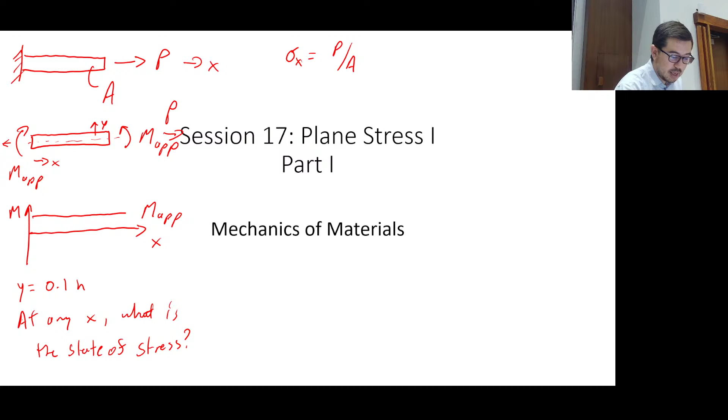I'll go ahead and say, all right, we know it's a rectangular beam. It has a width b. It has some height h. Okay, what is the how? Go ahead, start spewing some algebra. Yes, Mark. It has a stress from the P value and the bending stress.

Okay, yeah, so we're going to say the sigma total. Are there any... so in this case, right, are there any shear stresses involved? First off, I'm making an assumption that there's only normal stresses. But are there any shear stresses involved here?

What? Why do you say that, Stephen? Okay, this is a very interesting point. Are you right? Who agrees with Stephen? Is there a shear stress present in this beam? Yes, you agree, okay, all right. What is the equation for shear stress? VQ over IT, okay?

Also, what is the relationship between moment and shear force? dM/dx is equal to V. Well, what is dM/dx here? Okay, so M is constant. What is dM/dx? 0, right? So this is going to be equal to 0.

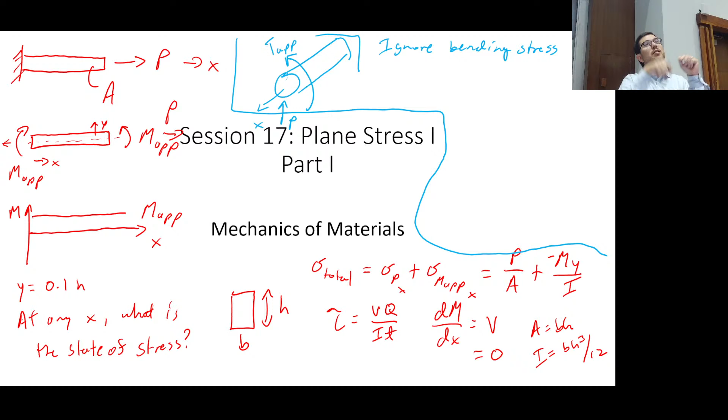Okay, it's not that complicated, because it's just going to be a function of x. It's the quantity P times quantity L minus x. But I don't want to do it right now. That would be negative M, where M is equal to P times quantity L minus x. Or actually, it's P times quantity x minus L. Because it's negative... no, it's positive because of the way it's drawn. So that's why I didn't want to do it.

Okay, so let's just talk about the shear stresses here. One thing to note, and I think it's maybe more difficult, is the transverse shear stress, so let's talk about that one first. The transverse shear stress is caused from the P.

And if I took a slice along the beam, not stresses now, but if I took a slice there, what would the internal shear force look like? Just negative P? Okay, actually no, it's just positive P. It's going to be exactly like it's drawn here. Oh, because of the reaction. Yeah, exactly, see, you just got it, right?

And this is one of the things I tried to explain in the video. If you go back to the question 3 video from yesterday, what you'll see is I went through the whole exercise of: here's what the beam looks like, this is the reaction force, then when you take the slice, you just gotta know that with the conventions we're using, the internal shear force on this slice is going to be in the same direction and at the same magnitude as whatever's applied at the end of the cantilever. So that's what the internal shear force looks like.

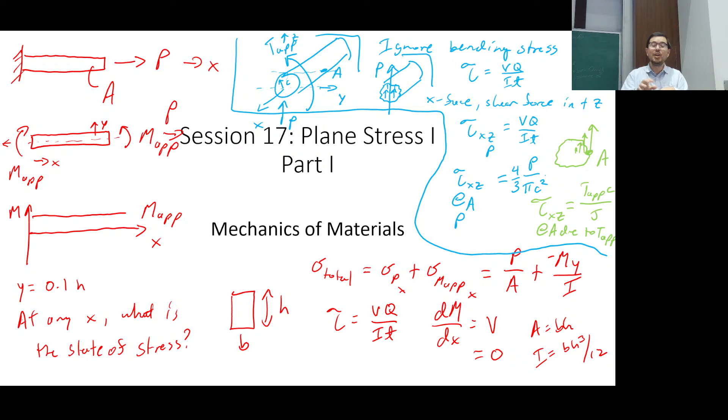We're trying to figure out how to describe the state of stress essentially throughout an entire object. And even if you're looking at the finite element analysis, right, you're like, ooh, nice, pretty color pictures, right? We want to be able to understand what those pretty color pictures mean, and it's not just, oh, the color is less than this value. Actually, we do some very smart things to kind of make it that way later in the class.

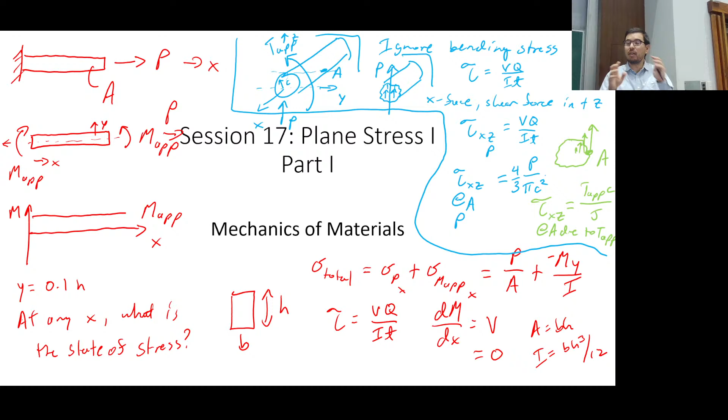You use something called the von Mises, or you could calculate an equivalent stress so that you can do that, all right? But the point is we want to be able to understand how to describe these 2D types of systems and their stresses that they might have, okay? So let's go on.

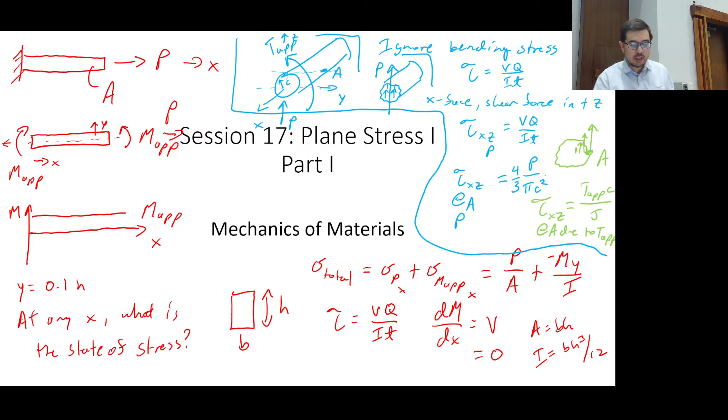Today, we're going to use method of sections again, and this time with rotated elements. We're going to transform material elements. Imagine you have a state of stress, right, from your combined loading analysis. You had this beam with some tau, some tau xy, some sigma x. Now we're going to rotate that element, look at it from a different perspective, and get a new set of stresses.

Now, these are equivalent states of stress, okay? But by rotating, sometimes we get a simpler description that allows us to relate more closely to the material testing we've done. You're like, wait, why? Isn't it just nice that... no, we want to rotate the element to get a more relatable depiction of the stresses. I hope that will become more clear.

And we're going to use this. I don't expect you to understand right now, but I do expect you to understand this in about 15 minutes. This is one of the ways we perform this equilibrium to figure out these equivalent stresses.

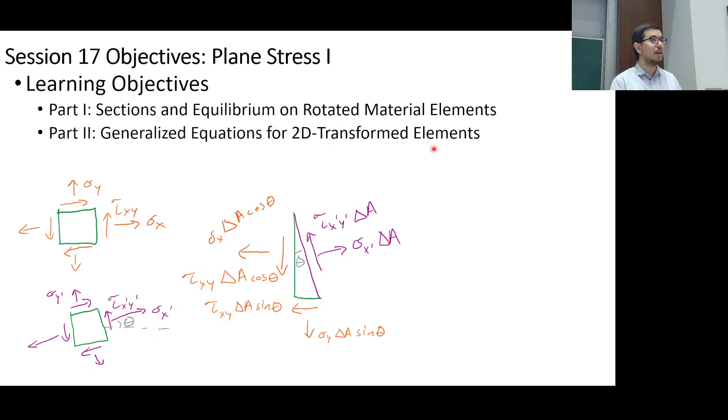We're going to then completely skip this technique and say, here are the generalized equations for these 2D transformations. You'll write these equations on your sheet, and then I will ask you on the exam to do it the old-fashioned way, and you will check—without telling me—that it matches your 2D transformations or equations, okay? You got that? If you bypass it and do it this way instead, you will not get full credit. You can take a look at previous exams to see examples of this being asked.

And then we'll talk a little bit about stress tensors and rotations, and how you can do this in Python or use linear algebra to perform these calculations. That is not that exciting for you, because I wouldn't ask you to use stress tensors on an exam.

So you're like, oh, okay, shut that off, I don't really need that. But there's a question that kind of gets to this point, and I think it's good to know. So if you take a grad class or do further work in mechanics, you'll be able to understand how these tensors are relatable to each other.

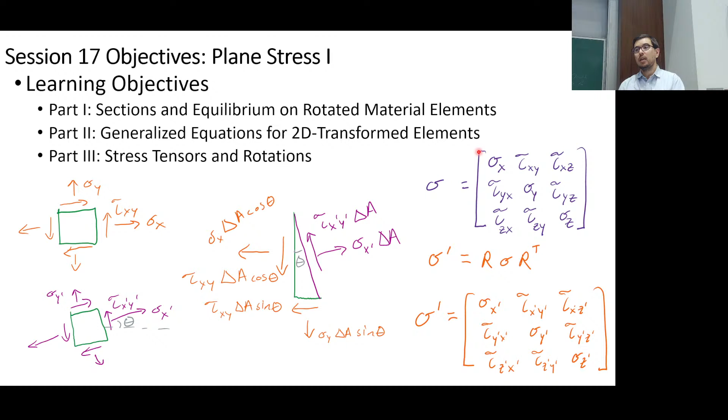So let's go to a generalized depiction of stress. We have 6 terms. At this point we're familiar with sigma x, sigma y, sigma z, tau xz, tau xy, and tau yz. So those are 6 terms: 3 normal stresses, not principal yet, and 3 shear stresses, that allow us to describe the state of stress in 3D for a linear isotropic material.

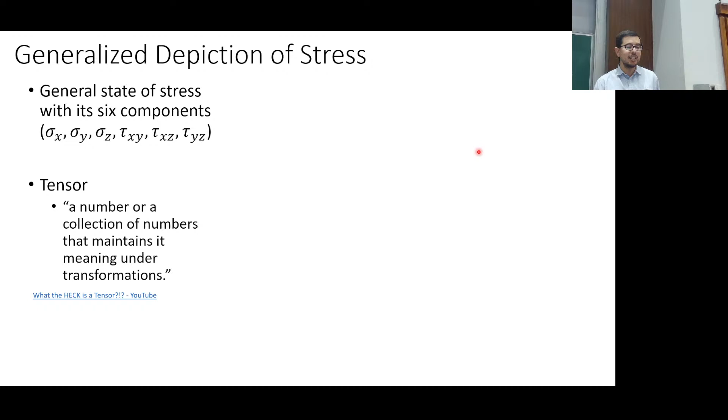The tensor is going to be a collection of numbers that maintain their meaning under transformation. You can watch a fun YouTube video on what the heck a tensor is—it's illuminating. The basic idea is that if you rotate the material element, since we're doing mechanics, we get a new depiction of equivalent stresses, and that's going to be equivalent to the original state of depicted stresses. That's how we connect the tensor math to a physical system.

But if you're just looking at the math, the property of a tensor is that if we rotate it, it's going to give us an equivalent depiction of what's happening.

So let's just refresh our memories in terms of how to draw these stresses, and we've already been doing this. We've got a sigma x on one side. We've got maybe a tau xy, maybe a tau xz. We've got other stresses on another face that we can draw out. That's a sigma y coming out there. We have a tau yx, a tau yz. And we've got this face here, right? So when you think about it, a tensor is not a bad way to depict all this information, because there's quite a bit happening on the face of a material element.

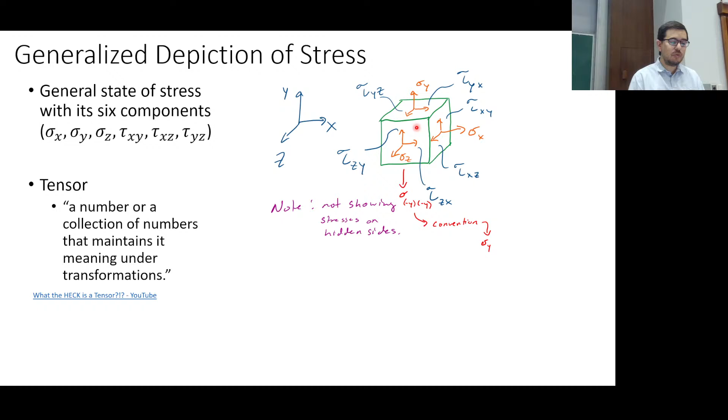But again, we only need 2 subscripts, right? Don't go into another class and say, oh yeah, but we discussed tensors, Aaron said that we just needed 3 subscripts. Be like, what? No, 2 subscripts, 3 values for each of those subscripts, at least for 3D. And we discussed before, like if it's in the minus y direction on the minus y face, then that's going to be equivalent to sigma y.

And then if you look online, you'll see some kinds of fun depictions of stresses on faces. And you know, one thing that we may have forgotten, is that in reality, these stresses that we're talking about are representing components of a traction vector, okay? That is kind of this internal force or internal load that you might have in your element, in your material, in your structure. These stresses allow us, these are the components, because these stresses are in fact scalars.

The Cauchy stress tensor can be written like this. We typically write it like this. It's the same thing though: 1 for x, or x for 1, 2 for y, y for 2, 3 for z, z for 3.

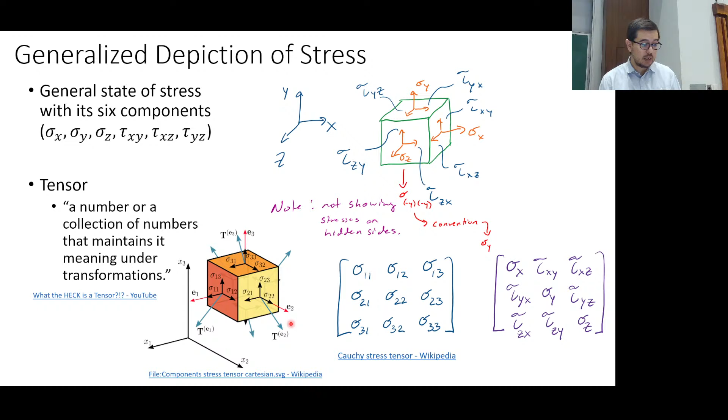Okay, now we're going to talk about a particular type, right? If you look back to the title of these slides, you're like, it said plane stress. You haven't even told us what plane stress is. Okay, well, here we go. Plane stress typically is going to be on a thin sheet of material.

And plane stress, yes, as you can imagine, it means plane in the sense of planar, right? Not in the sense of vanilla yogurt. Actually, vanilla yogurt is not plain yogurt, right? That's right. Yeah, plain yogurt is plain yogurt.

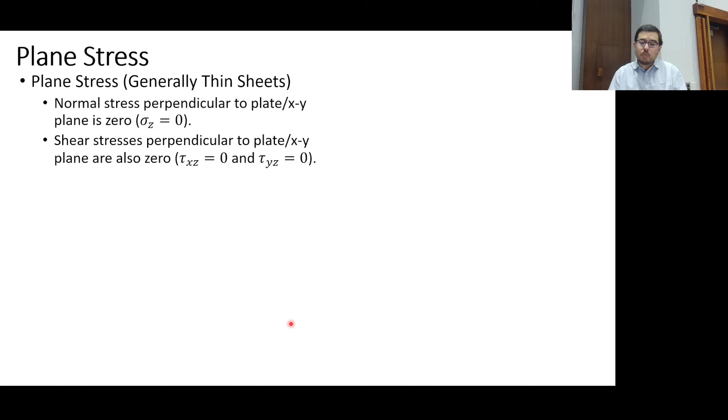Okay, never mind. Okay, so here the normal stress perpendicular to the plate or the plane is going to be equal to 0. You can still have shear stresses in the plane, but again, the shear stresses out of the plane are going to be equal to 0.

So think back to the thin-walled pressure vessel. What do you see there? Remember, we said I've got a sigma 1, I've got a sigma 2, and I don't have a sigma 3. We said that sigma 3 was going to be really small. So we have sigma 1, we have sigma 2, and the sigma 3 — Professor Roylance was talking about, okay, there's not an appreciable thickness for it to, or it's diminished. I don't remember the exact fancy words to use.

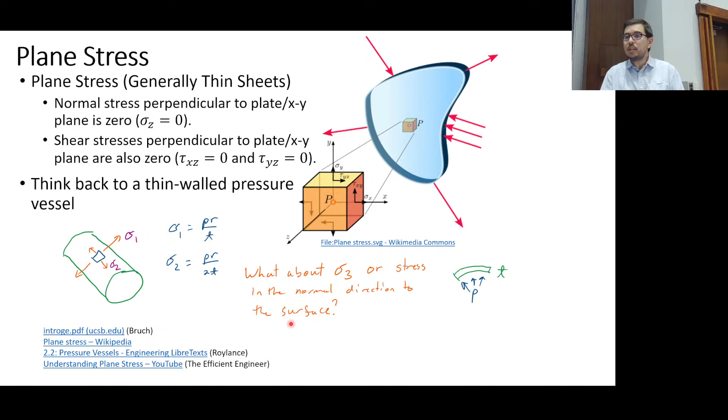But there's not appreciable thickness, essentially, for us to build up stress in the z direction, in the radial direction if it's a pressure vessel. Or the way I look at it more simplistically is that there's a pressure on the inside, there's no pressure on the outside, and the pressure and the stresses in plane are a lot larger than the pressure that we're applying to that system. So sigma 1 and sigma 2 are going to be much, much greater than the pressure, or whatever we would consider to be sigma 3, because the R divided by T, the radius divided by the thickness for these thin-walled pressure vessels is a factor of 10 or more.

So this is kind of a real-world example. The thin-walled pressure vessel is a real-world example of plane stress.

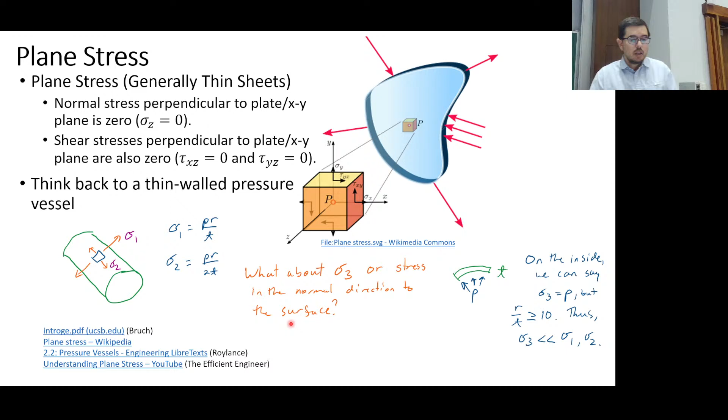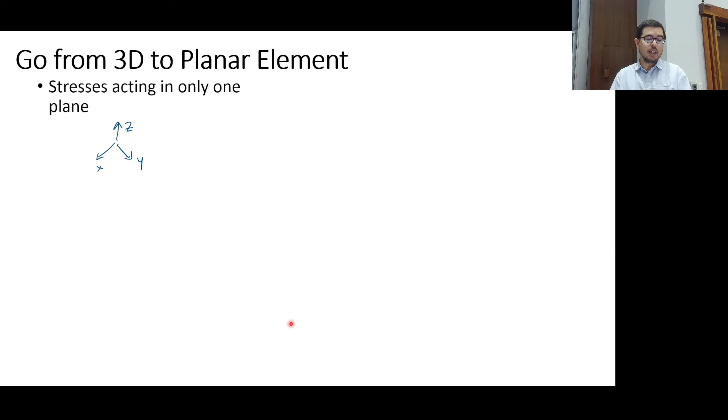Now, what does this mean if you had a 3D element of stress, or a 3D depiction, right? So here, X, Y, Z, here's the cube. Here are going to be our stresses. We have, let's say, a sigma X. We have another sigma X on the other side. We have a sigma Y. We have another sigma Y on the other side. We have our shear stress, tau xy. We have another shear stress that matches that one. And then we have two more that allow us to stay in equilibrium. All right, you see that?

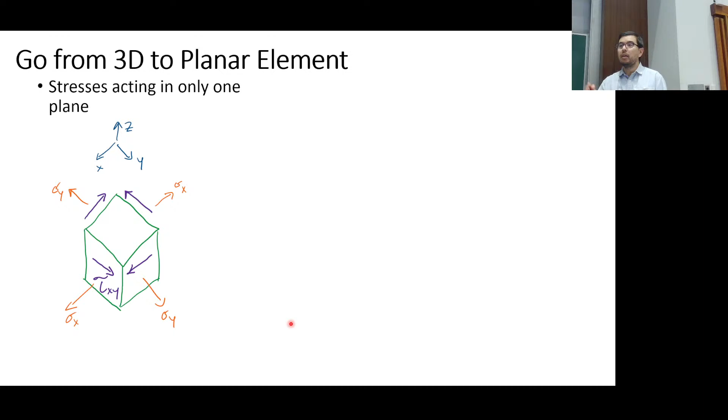Is this working? I see some alertness, some smiles. Well, is there any thoughts or questions on this so far? Okay, yeah, all right, it is what it is.

So the 2D representation for plane stress, surprise surprise, you've never seen one of these before. It's just a box with sigma x and sigma y

and tau xy. And remember, I talked about this a little bit in one of the questions. If I know tau on one face of the shear stress, I know all four faces. You just got to get one of them right.

So here, you can think about how to do it. Not always, but I think of it as the arrows have to be pointing to each other. So I'm going to put one up here pointing to it. But you can do it a different way if you want. You can say this is up, so therefore I've got to have something down on this side. Because I don't want it to move vertically. But then that causes counterclockwise rotation, so then I've got to have something on maybe this side going this direction to compensate for that.

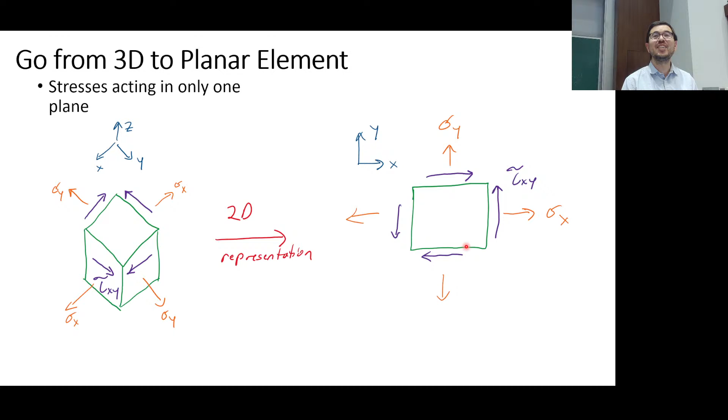Who sings that? It's Saturday night, right? This is how we do it. This is how we do it. No? Is that from like the 90s? Okay, this is how we do it.

All right, so now when we have a transformation, what we're saying again is that we are going to define a stress at a point, and these stresses on opposite sides of the cube are going to be equal and opposite to each other in magnitude. Okay, so that's fine.

So we say okay, now we put a dot in the middle. Woohoo! All right, okay. We're now going to do the transformation.

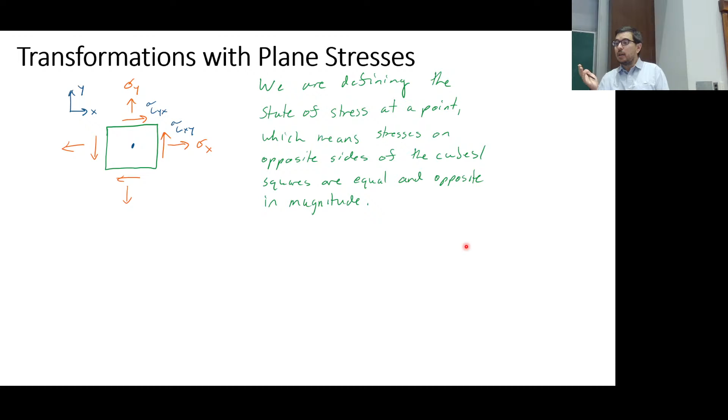This depiction of the stress is supposed to represent a location on your structure, right? So that makes sense. We've done finite element analysis, you know there's a stress distribution. We've done beams, we've done rods, we've done bars, we've done trusses, we've done thin wall pressure vessels, right? What else am I forgetting? We've done a bunch of different things.

So what we're saying is that every geometric location has a state of stress on it, and we put that little dot in the middle, which I often forget to put, but that describes where this element is on the structure. And of course, this is infinitely small.

So when we apply a rotation, we go from this, which is just exactly the same drawing, to something like this. So for our intents and purposes, we're only rotating about this point, and we're only rotating about an axis that is normal to the page.

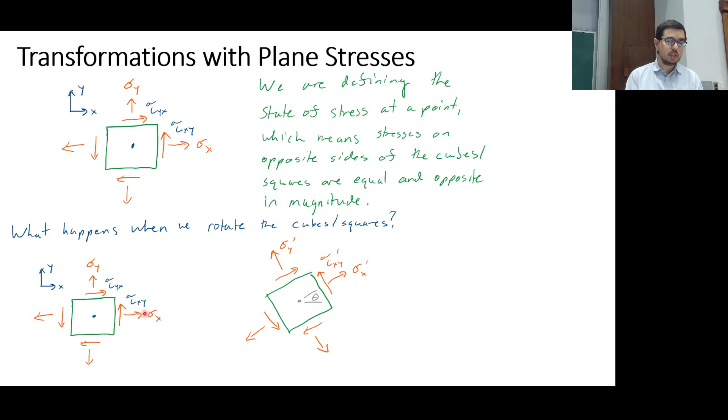So here you see we've rotated by some theta. This x was here, sigma x, and now this x prime is at some angle relative to the original x. You see this? So we're going to say that theta is the amount we rotate. And there are other ways to look at that theta, you could look at it down here if you want.

So this is just to give us an idea of what a transformation looks like qualitatively. We haven't figured out how to quantify these new stresses yet. This is just what we're doing.

And you can think of going back to what's happening here as if I took a slice. So here is a slice, that greenish, nice, grassy looking color in there, I guess my grass doesn't look like that, my grass is kind of brown. But you see, that's a plane there, right? And what I'm saying is, at a particular location, this could be a different plane that I've put in, and now I'm looking at a new state of equivalent stresses.

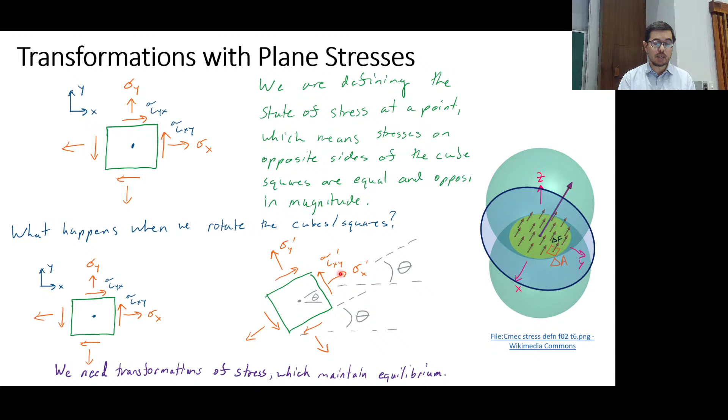I didn't say it, but we usually say sigma x becomes sigma x prime, tau xy becomes tau x prime y prime or tau prime xy, whatever, and then sigma y becomes sigma y prime. So we're dealing with, this is essentially the x prime direction, this is the y prime direction.

For your other classes, have you had to do rotations before? I mean, of course, we've all looked at how a wheel rotates. But have any of your classes required you to do transformations, rotations? Okay, well, this is your first time. Woohoo, okay.

How are we going to get from our sigma x, sigma y, tau xy to sigma x prime, sigma y prime, and tau x prime, y prime? This is plane stress. We have three stresses, and we need to get three new stresses.

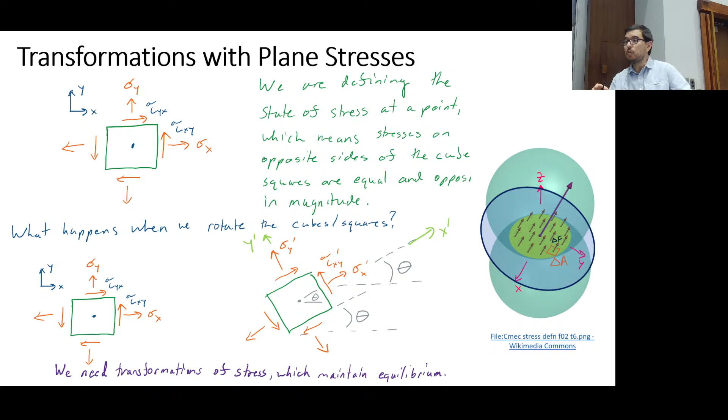So here is one approach. We start with the element having known stresses, and we rotate it by theta. Then we use the method of sections: we take a cut, and we do equilibrium. We might also take another cut, so we can repeat for y prime. This is the process.

It sounds very simple, but in practice it's a little bit tricky, a little bit of a mind bender. So here we go: we take this element that has the state of stress we love, and we rotate it by some amount, theta. Then it has a sigma x prime, tau x prime y prime, and also sigma y prime, and we can draw the rest of the arrows on it.

So it's like, okay, you just repeated exactly what we did before. Again, this is the question: how do we relate sigma x, sigma y, and tau xy to sigma x prime, sigma y prime, and tau x prime y prime? This is how we do it.

Where is my laser pointer? Okay, what have I drawn here? This right angle corresponds to this right angle right there, and then this point is this point here. So we've drawn just from this top left down partially to that location.

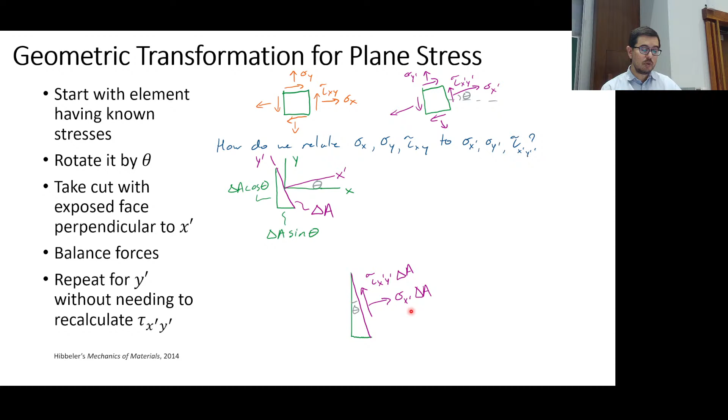So now we can go a little bit further, and we can say that this force acting on this purple face associated with a normal stress is going to be sigma x prime delta A. Does everyone see that? I know we're going at a pace, I hope that this makes sense.

Remember, I've said this multiple times: when we do equilibrium, it's not equilibrium of stresses. Yes, we just did combined loading and we added stresses to each other, so you're like, that is equilibrium of stresses - no it isn't. We have to think about forces and moments. Here, what we're beginning to say is this is a static structure, and it has to be under equilibrium.

I took a slice, right? It was under equilibrium before I took the slice. It was a static structure, and then I took a slice, and now I'm doing the same thing we've done in other structures. That still has to be under equilibrium after I've taken the slice. So I want to be able to come up with a set of forces.

We're actually not going to use equilibrium of moments. I know it's sad. Are you sad? Maybe you're a little bit sad. But we're going to use equilibrium of forces to be able to figure out what these new stresses are.

Remember that we have a sigma y acting on this face. Yes, the face is a little bit less than it was before, but that stress is constant along that face, and it's acting on that area, delta A sine theta. So we have sigma y delta A sine theta. And we can also say, hey, there was a shear stress on that bottom face - again, it's a shorter face than what we had up here, but it's tau xy acting over delta A sine theta. You see where this is going?

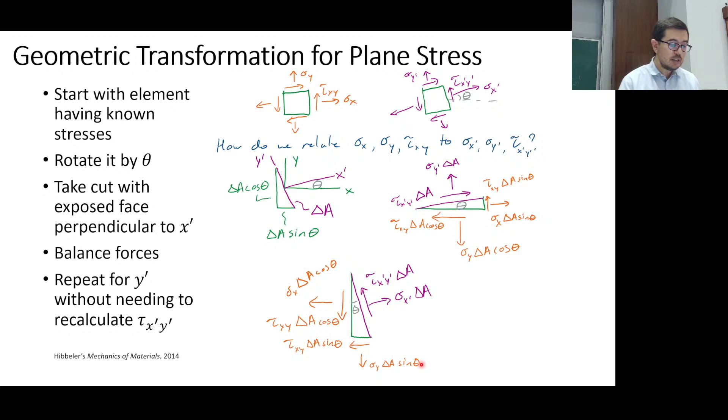Okay, so let's do an example. Let's say that you have a sigma x equal 50 megapascals, a sigma y equals 100 megapascals, and a tau xy equals 0. Question is, what are sigma x prime, sigma y prime, and tau x prime y prime when the angle of counterclockwise rotation theta is 30 degrees.

So isn't this nice? We've done so many things that were just kind of algebraic, and this is actually using numbers. This is one type of problem where we will have a generalized description, but it's often not a bad idea to use numbers.

So what do we have here? We have an element that we've rotated, amount theta. That's going to be 30 degrees. We have our sigma x prime, we're going to have our sigma y prime, and we're going to have our tau x prime y prime as well.

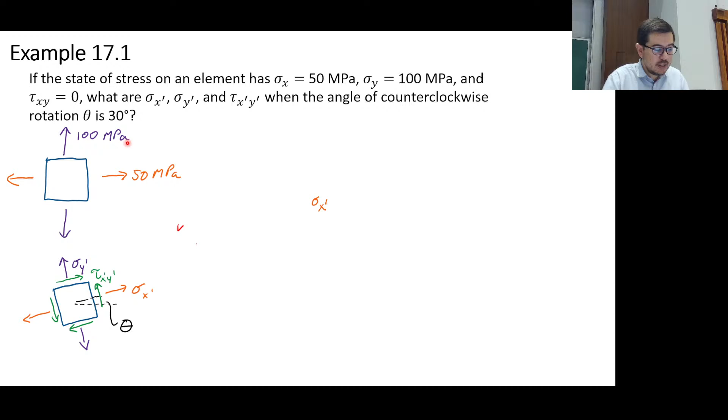Please use exaggerated angles, meaning make this a very small angle. Even though it's 30 degrees, make it like 15, just so that you can keep track of where the small angle is. And here we go.

So we have the 30 degrees in there. We have our y prime like this, and we're going to slice like this. We have our delta A there, our delta A sine 30 degrees, our delta A cosine 30 degrees, and we have this 50 megapascals, and now something interesting - we are going to have an angle there as well. There will be another angle there. Now what in the world happened here?

Well, we need to equate the component of stress from sigma x to this same direction. I can't say, hey, 50 delta A cosine 30 degrees, even though that's a face, is equal to sigma x prime times delta A - cannot do that. Why not? Why can't I just add or subtract those vectors with each other? They're not in the same direction, right? So what I have to do is an additional little tricky rule.

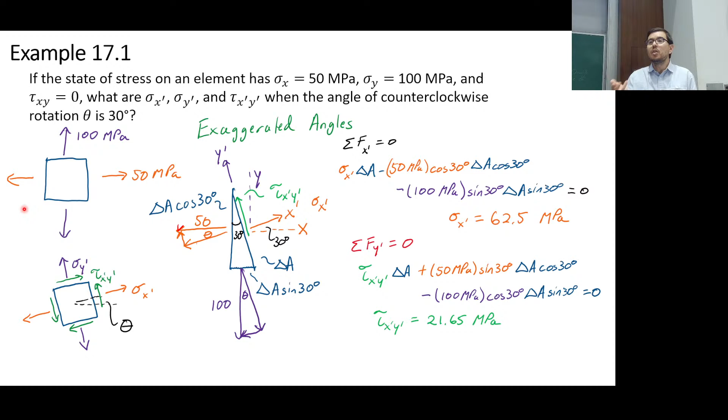And that's it. This is a very powerful technique, though, because it shows us we didn't do anything rocket science-y. Right? We were saying, hey, I want to find the equivalent state of stress, and I want to do it at a rotated angle. All I've got to do is equilibrium.

You know, all we need is love. Maybe in this class, all we need is equilibrium.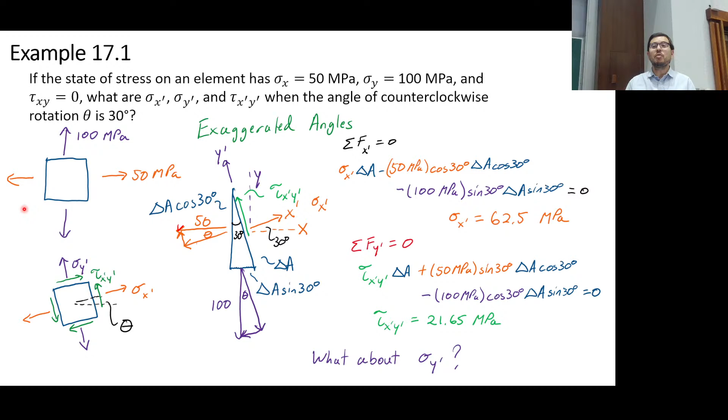Okay. All right, but the love just went out the window because we got to do it for sigma y prime as well. All right, so you got to do this again. And I'm running out of time, so I'll try to be kind of fast here. All right, and you can go through this if you like in more detail.

But here we now have this top face, okay, and that's the face that's going to be parallel to sigma x prime. And sigma y prime is going to be orthogonal to it, and tau x prime, y prime will be acting on that face.

And we can, once again, do equilibrium on the y prime and the x prime direction. So if you do this all out, okay, you get something like this. And you can use Colab if you like to solve it, and sigma y prime comes out to be this. Okay. Any questions on this?

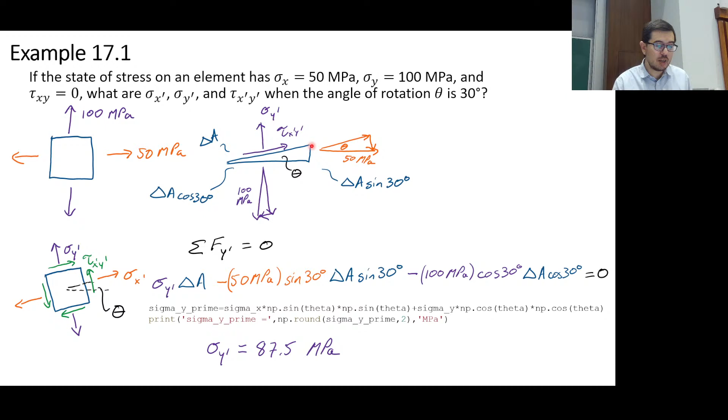It's pretty straightforward, right? It's not bad. It's a process that I would like us to be able to master and be able to use, and then toss it away because you're not going to use this process, okay? Because it's time consuming. It's not time consuming for a computer, right? But there are actually faster ways for us to calculate stresses, rotated elements.

Okay. This one, the previous one, had no tau xy on it. This example, which you can look at in the notes, has a tau xy on it, which makes things even more tedious. Here's a tau xy, here's a tau xy here, okay, and then that one has components also, right? Two vectors that are going to be in the x prime and the y prime direction, and so also requires appropriate care. Okay, so it gets even longer.

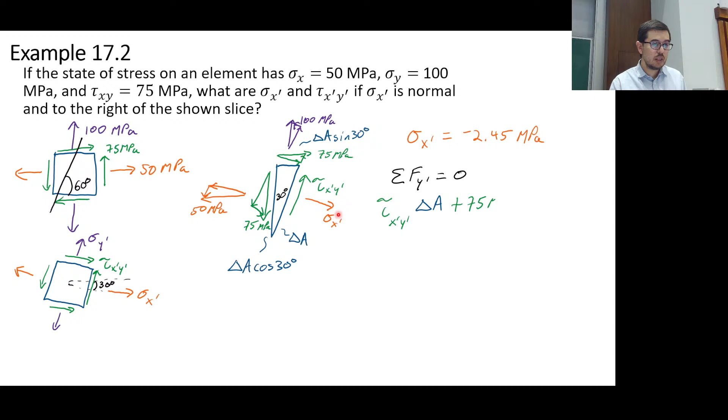All right. Okay. Now, so there'll be some questions.

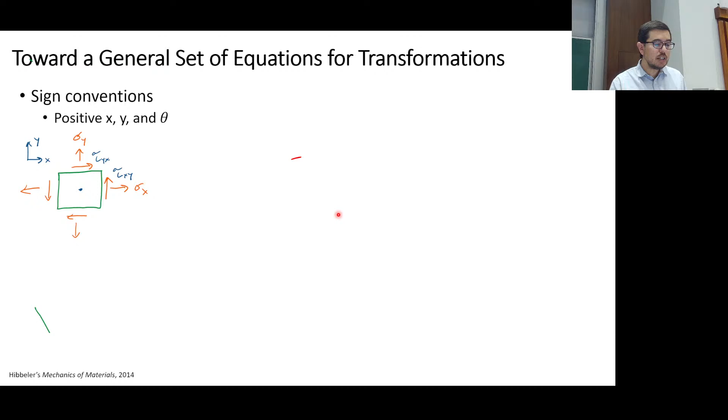The generalized equations essentially are doing exactly what we did, but using algebraic symbols, variables, instead of actual sigma x equals 50 megapascals. And so these equations, if you go through them all, which I won't do right now, allow you to shortcut what we just did. Okay, do you see that? You simply put in your sigma x, your sigma y, and your tau xy, and the angle of rotation that you want, and boom, out pops sigma x prime.

Okay. Please, at least one time though, for your sake, do it the long way. And remember how to do it, because when we ask you to do it out the long way, you've got to be able to do it the long way. Okay? And why are we being so particular about that? Because it shows how you can figure out the equivalent stresses just by using equilibrium. All right, so if you're stuck on a stranded island and you don't have these equations with you, you could go ahead and rederive them if you wanted to.

Has anyone ever thought about what they would do on a stranded island? No? You haven't thought about that? I think I knew one person I would say, I would try to get to like maybe Newton's laws. Right? I mean, you think about like how to, right, going through this. Actually, I think they said they would go farther, right? But that would be one thing you could do. You could rederive the laws of mechanics.

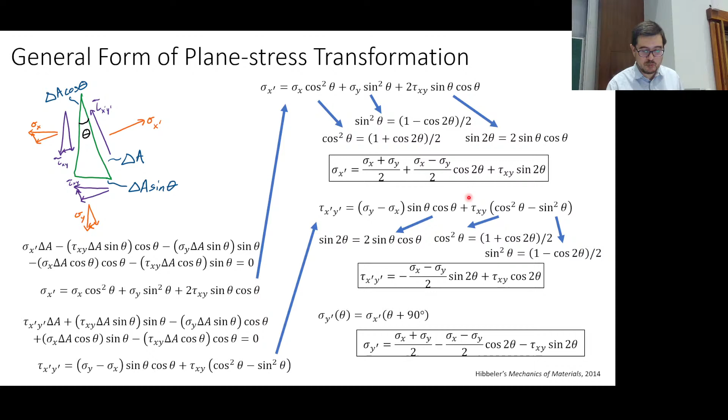All right. The last thing, okay, that I just want to emphasize is that you can then use these expressions to plot as a function of the angle of rotation what the new stresses are. Okay? And doing that shows you that they can be maximized and minimized. Why would that be useful? Well, maybe I want to know what the maximum equivalent stress might be in a particular direction to figure out if it's going to fail.